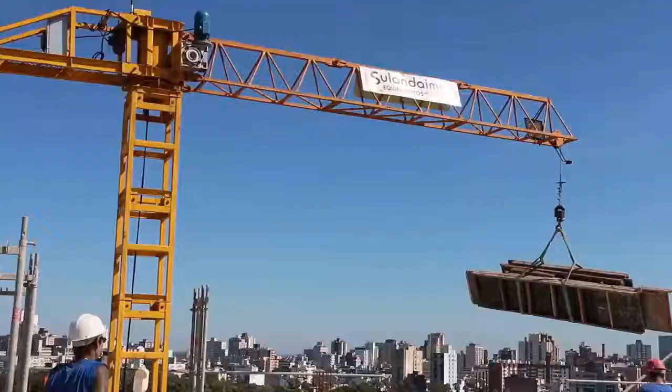Today we are going to discuss building services. Let us begin our first lecture for building services. In today's lecture we will discuss different topics: first, the introduction to building services; second, house water connections; and lastly, the water piping system in buildings.

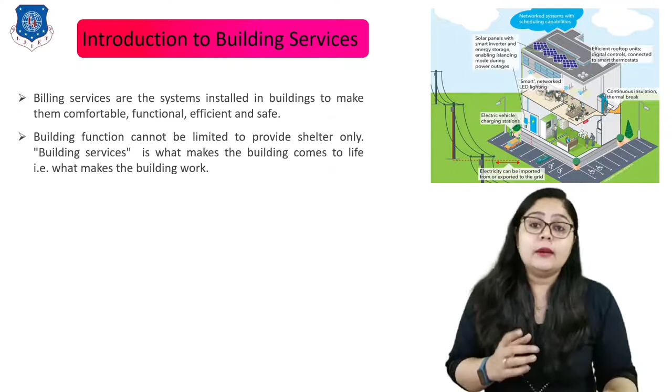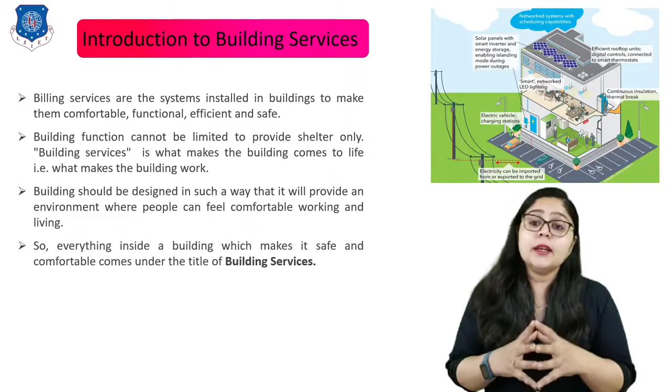Let us start with topic number one, introduction to building services. Building services are the systems installed in a building to make it comfortable, functional, efficient and safe. Building function cannot be limited to providing shelter only. Building services are what make the building come to life, meaning what makes the building work. A building should be designed to provide an environment where people feel comfortable working and living. Everything inside a building which makes it safe and comfortable comes under the title of building services.

Now let's see the types of building services. Different building services include water supply, drainage, electrification, gas supply, HVAC (heating, ventilation and air conditioning), telecommunication, internet, CCTV camera network, fire safety, sound insulation, thermal insulation, anti-termite treatment, waterproofing, television cabling, escalators and lifts. These are the basic needs that a building must have.

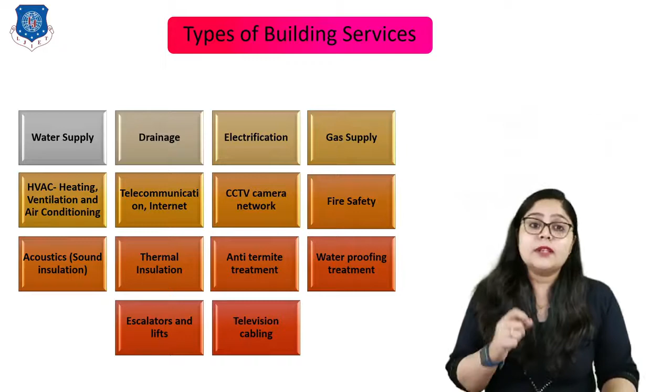Now let us discuss the second topic for today's lecture, house water connection. The first important term is what house water connection is all about. Then we will see the requirements of pipe fittings and fixtures, and lastly the pipe fitting and the fixtures themselves.

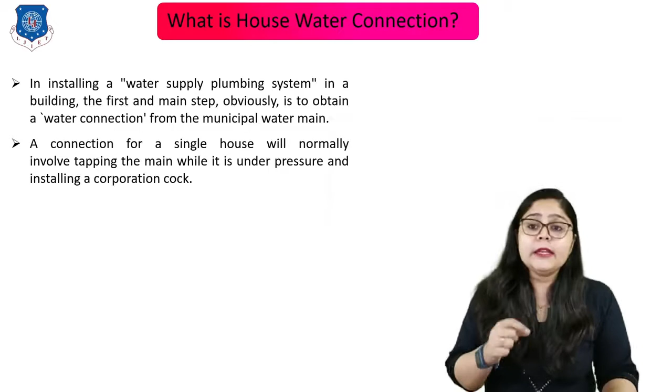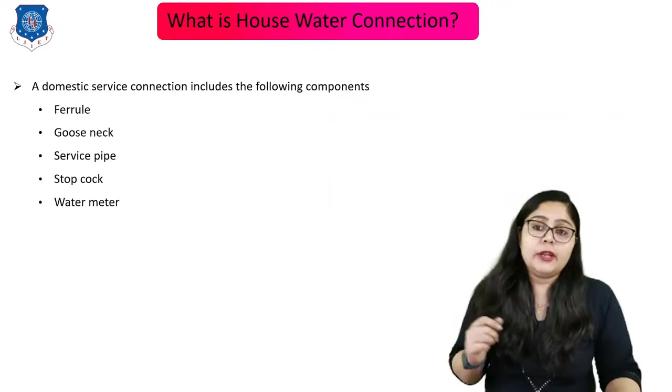Let's begin with what is house water connection. In installing a water supply plumbing system in a building, the first and main step is to obtain a water connection from the municipal water main. The connection for a single house normally involves tapping the main while it is under pressure and installing a corporation cock. A domestic service connection includes the following components: ferrule, gooseneck, service pipe, stopcock and water meter. Here is a picture to give you a brief idea of all of them.

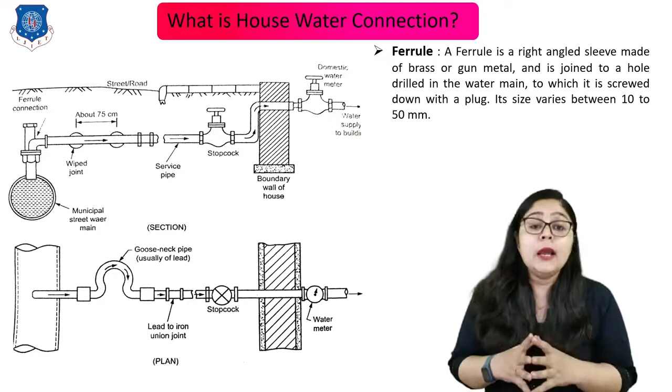Now let us discuss the first component, the ferrule. A ferrule is a right-angle sleeve made of brass or gunmetal and is joined to a hole drilled in the water main, to which it is screwed down with a plug. Its size varies from 10 to 50 mm.

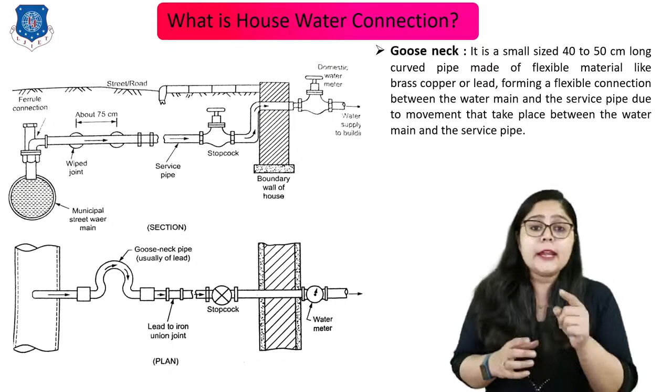The second component is the gooseneck. It is a small, 40 to 50 centimeter long curved pipe made of flexible material like brass, copper or lead, forming a flexible connection between the water main and the service pipe due to movement that takes place between them.

Next term is the service pipe. It is generally a GI pipe, meaning galvanized iron pipe, of size less than 50 mm diameter. It should be laid underground in a trench in which no sewer or drainage pipe is laid. A service pipe supplies water to the building from the municipal main, as shown in this figure.

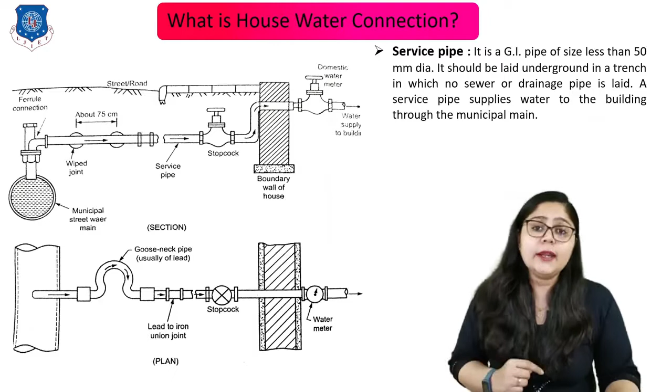Next is the stopcock. It is provided before the water enters the water meter in the house. It is installed in a suitable masonry chamber with a removable cover and is fixed in the street close to the boundary wall. Sometimes it is provided just before the water meter inside the house, keeping both of them in one chamber.

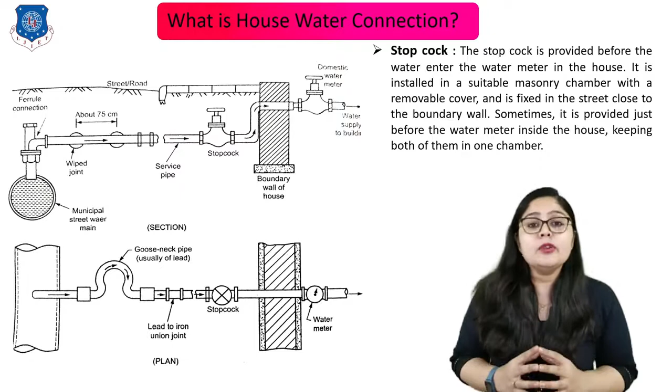Now let us see the concept of the water meter. The water meter measures and records the quantity of water consumed in the house. The domestic type of water meter is fitted into the service pipe with unions, which enables the meter to be changed where necessary.

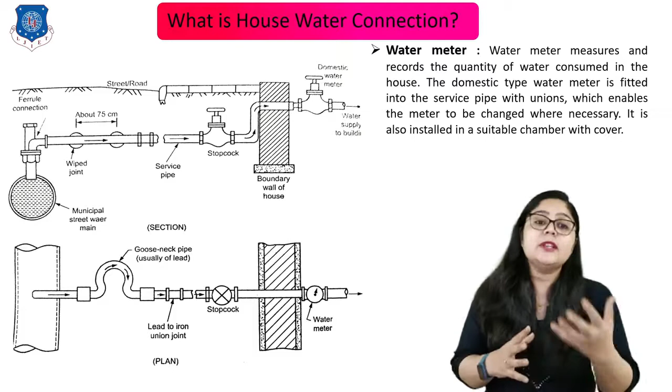It is also installed in a suitable chamber with the cover. So that's all for house water connections.

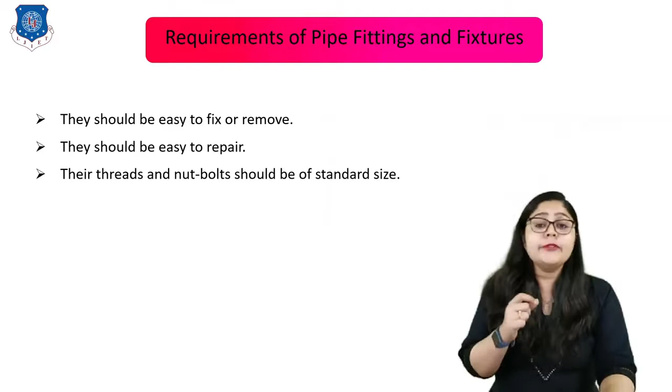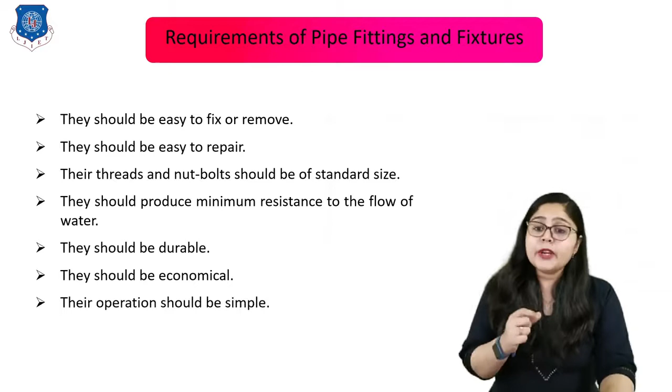Now let us move to the next topic, which is requirement of pipe fitting and fixtures. The first requirement is that they should be easy to fix or remove, and easy to repair. Their threads and nut bolts should be of standard size. They should produce minimum resistance to the flow of water, be durable and economical, and the operation should be simple. So these are the requirements.

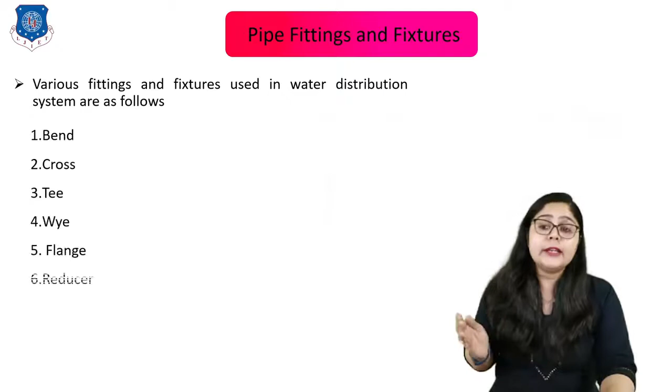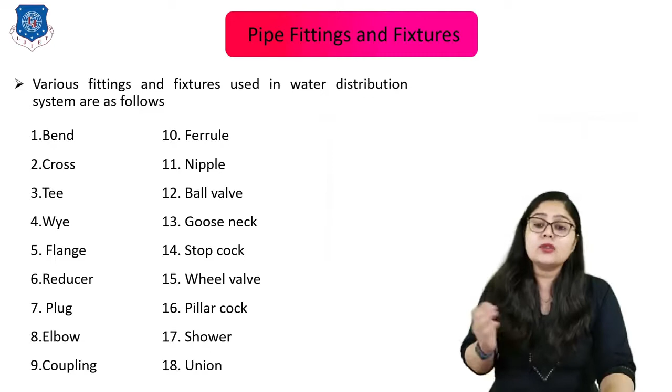Now let us move to the last topic, which is pipe fitting and fixtures. Various fittings and fixtures used in the water distribution system are as follows: bend, cross, tee, wye, flange, reducer, plug, elbow, coupling, ferrule, nipple, ball valve, gooseneck, stopcock, wheel valve, pillar cock, shower and union. Let us discuss all one by one.

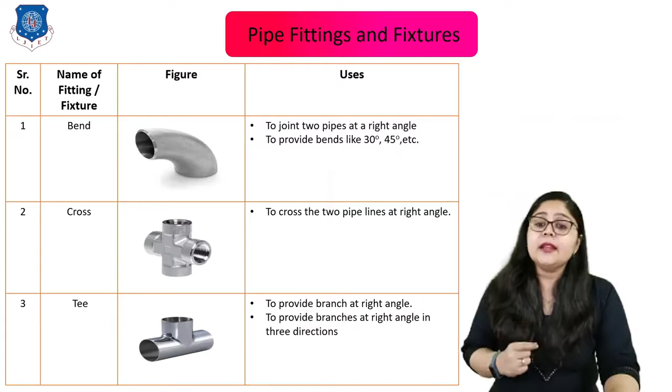The second one is the cross, shown clearly on screen, which is used to cross two pipelines at right angles. Next is the Tee, which provides a branch at right angles, as well as branches at right angles in three directions. So these are the three terms.

Now let's move to the fourth term, which is Wye. These are used to provide a branch at an angle other than the right angle.

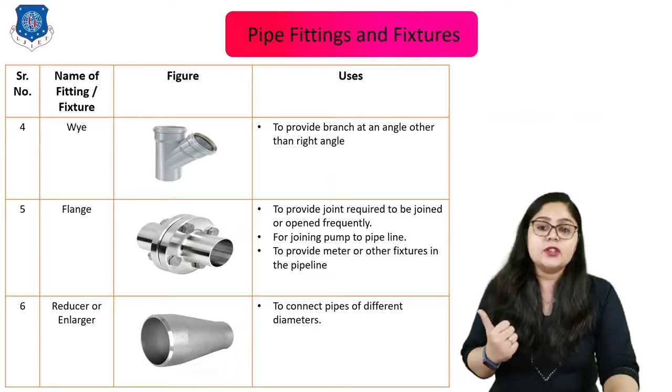The sixth one is the reducer or the enlarger. Here you can see the reducer and enlarger pictures, which are used to connect pipes of different diameters.

The seventh one is the plug. These are used to close the end of a pipe, or to close the end of a pipe in order to fix the bib cock or the shower.

Next is the elbow. These are used to provide a joint required to be joined or opened frequently, for joining pumps to the pipeline, and they provide meters or other fixtures in the pipelines.

The next is the coupling, which is very important. These are used to connect two pipes.

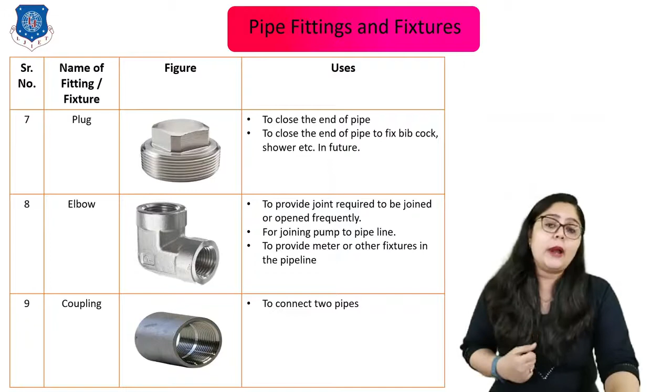The 10th one is the ferrule. It is used to give water connection to the consumers, as well as to control the quantity of water to be supplied to the consumers.

Next is the nipple. It is usually used for connecting two female threaded fittings or pipes. It is used as an adapter from one connection type to another, and is mainly used in lower pressure piping systems.

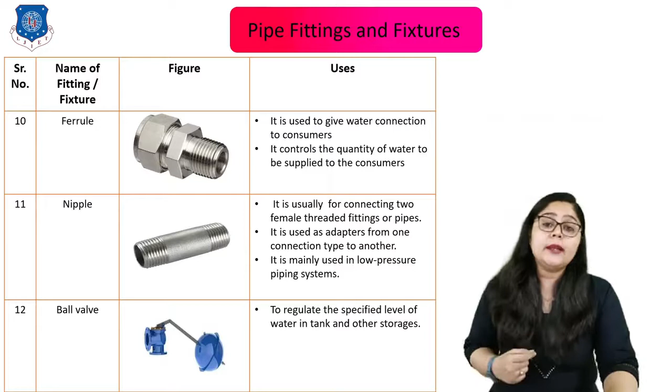Next, the 12th one is the ball valve. It is used to regulate the specified level of water in the tank and other storages.

Now the 13th one is the gooseneck. It is used to provide a flexible connection of the service line with the main pipeline.

Next is the stopcock, which is used to stop the water flow in the pipeline temporarily. So we can say it is used to stop the water flow for repair.

Next is the sluice or gate valve. These are used to control the flow of water in large pipelines, and also to divert the flow of water into other pipes.

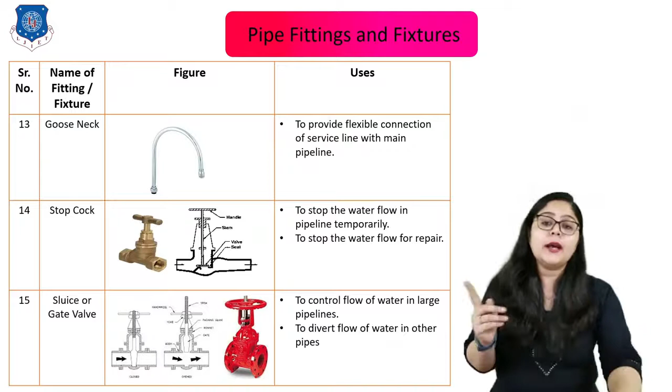Next is the pillar cock. These are used for fixing in wash basins and sinks.

Now the next is the shower, which is mainly used for washing in the bathroom or for sprinkling water in the gardens.

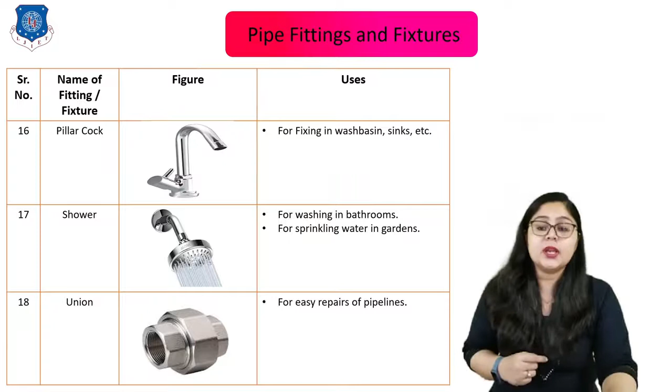Next is the union. These are used for easy repair of the pipeline. Next is the bibcock.

So it is used in wash basins, bathrooms, kitchens, etc., from where the consumer gets the water.

Next is the water meter. It is used for measuring the flow to domestic buildings as well as to compute the volume of water used from the reading on the meter.

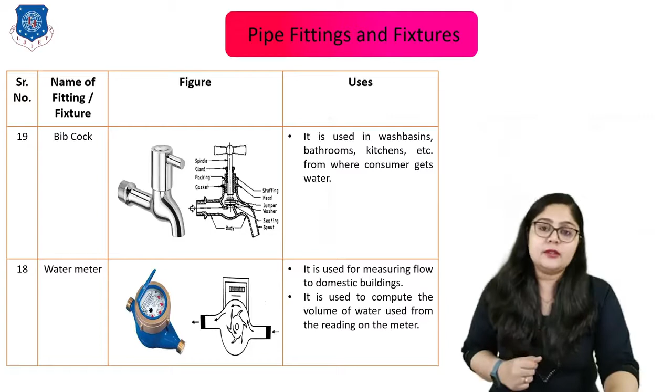So these are all the fittings which are very useful for different purposes in a house. It is very important to know all the pipe fittings and fixtures. Now let us move to the next topic for today's lecture, which is the water piping system in buildings.

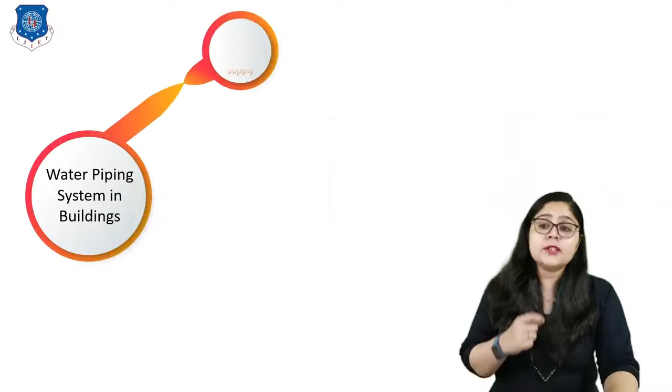The first type for water piping system in buildings is the piping system using direct supply. Then we will see the piping system using overhead tank, then the piping system using underground and overhead tank supply, and lastly the pump system. Let us begin with the first type, piping system using direct supply.

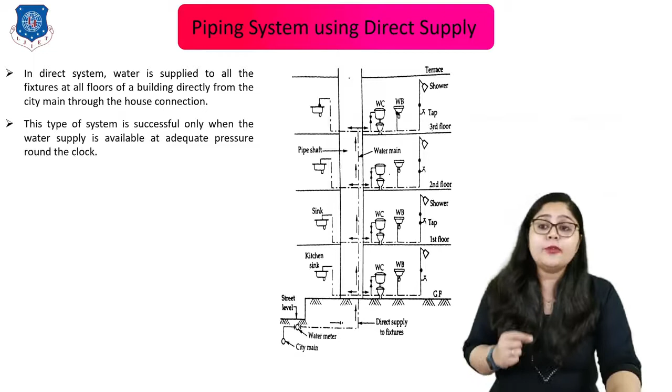In direct system, water is supplied to all the fixtures at all floors of a building directly from the city main through the house connection. This type of system is successful only when the water supply is available at adequate pressure round the clock.

This system is suitable for countries that maintain high standards for water supply, as it eliminates the need for storage tanks. It is very convenient and economical to users as it avoids the necessity of storage tanks, pumping sets, etc. In this figure, you can see how this system works.

Even in such a system, separate provision of supplying stored overhead water to closets and urinals is sometimes made, to ensure supply to these fixtures in case of a breakdown in the city main or accidental low pressure. So this is all about the piping system using direct supply.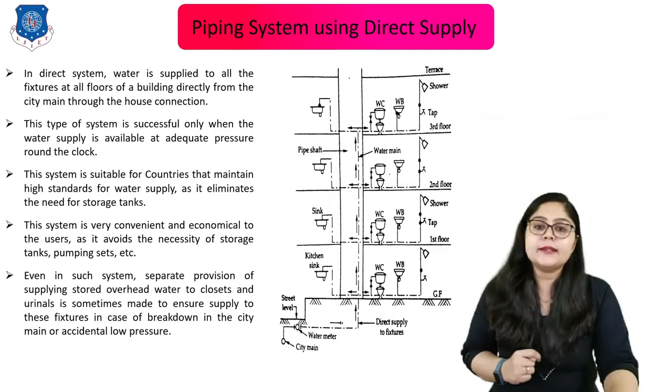Now let us understand the second term, the piping system using an overhead tank. In many cities, the water pressure in the municipal mains is sufficient to make water reach up to 3 to 4 stories, but only for a limited period in the morning and evenings.

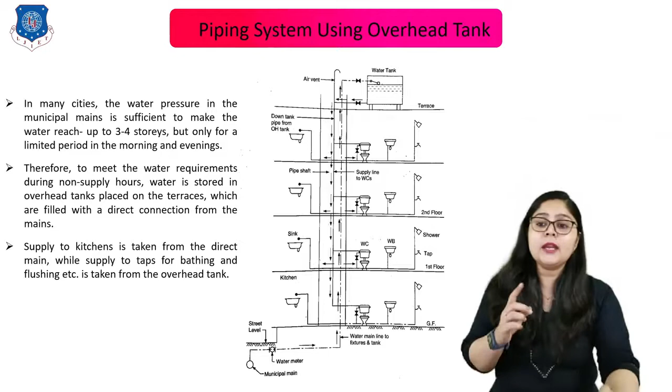To meet water requirements during non-supply hours, water is stored in overhead tanks placed on the terrace, which are filled with a direct connection from the mains. As you can see in this figure, a water tank is provided at the terrace. Supply to the kitchen is taken from the direct main, while supply to taps for bathing and flushing is taken from the overhead tank. So this is all about the overhead tank system.

Now let us understand the piping system using underground and overhead tank supply. When municipal water supplies are at low pressure and either intermittent or continuous, it becomes necessary to store water in an underground tank.

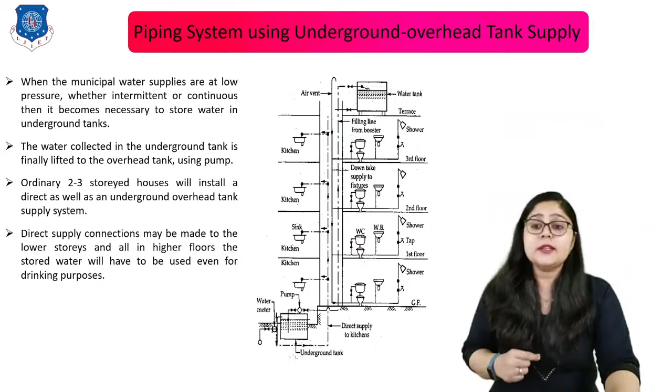So here you can see a terrace water tank is there, but still an underground tank is also added. The water collected in the underground tank is finally lifted to the overhead tank using a pump. An ordinary 2 to 3 storied house will install a direct as well as an underground overhead tank supply system. Direct supply connections may be made to the lower story, while all higher floors will have to use the stored water even for drinking purposes.

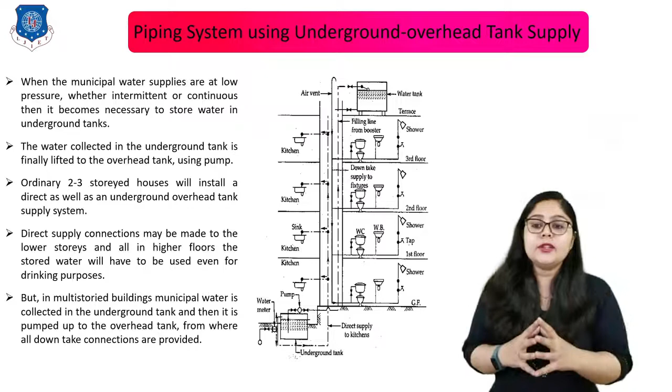But sometimes in multi-storied buildings, municipal water is collected in the underground tank and then pumped up to the overhead tank, from where all down-take connections are provided. So this is the concept of overhead tank supply.

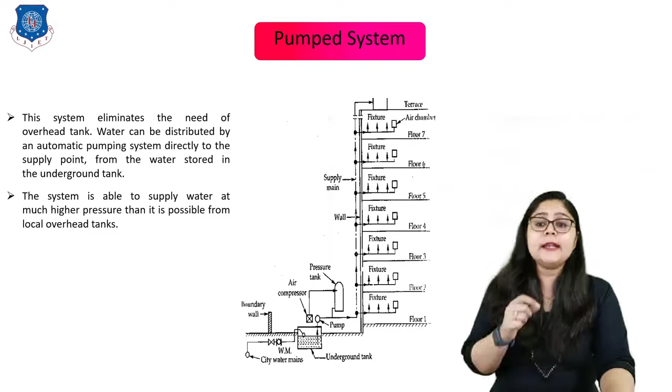Now let us understand the last system, the pumped system. This system eliminates the need of an overhead tank. Water can be distributed by an automatic pumping system directly to the supply point from the water stored in the underground tank. This system is able to supply water at much higher pressure than is possible from the local overhead tanks. So this is the concept of the pumped system.

So in today's lecture, we have learned basically 3 topics: introduction to building services, house water connection, and water piping system in buildings. I hope you all understand these 3 topics in detail.